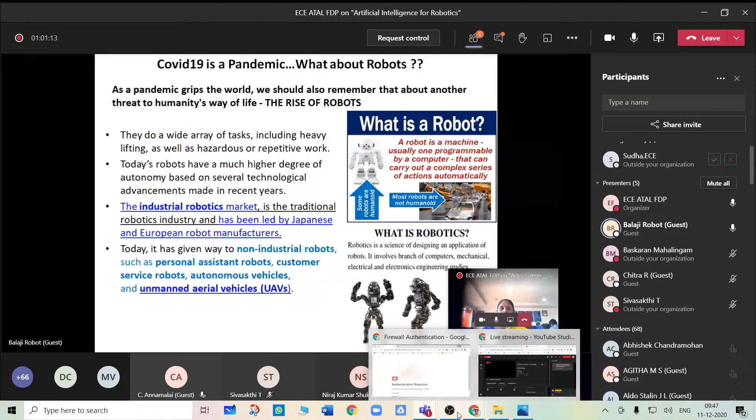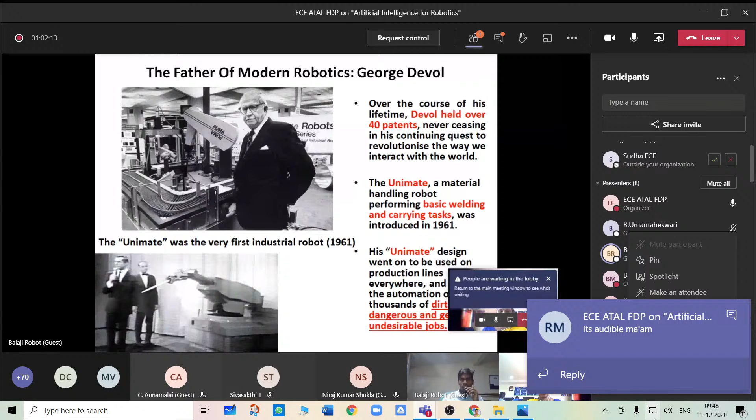Major reasons for using robots: first of all, rising labor cost, workforce efficiency, convenience, productivity, and these boost industrial robot demand.

The labor cost is significantly high in the total industrial operation cost, generally making up 50% to 60% of the total cost. For example, in operating a warehouse with manual jobs, staff consist of two categories: direct and indirect, and these departments manage the cost significantly.

Robotics has become a notable means to tackle the rising wages of the workforce. Industries are increasingly relying on robotics for a convenient and efficient way of reducing operational costs.

There are nine benefits of using robots: first of all, lower manpower cost, getting work done instantly, eliminating human errors, reducing human errors, improving productivity, and improving employee satisfaction. Next, you can scale up or down easily.

Like scaling to a bigger size, you can make our factory systems do better with less. This helps future-proof our industries.

Next, the types of robots, the classification. There are three major types: first, unmanned aerial vehicles; next, unmanned ground vehicles; and unmanned surface vehicles. These are the three things - the first classification in the robotic field.

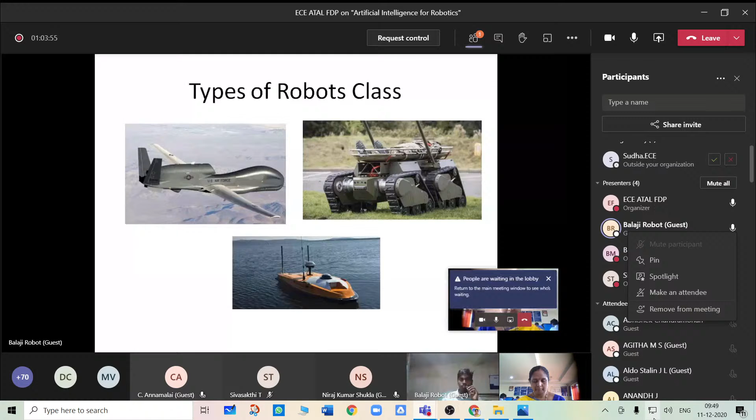Next, the applications of robots. First of all, home service - this includes home cleaning robots, surface cleaning robots, and personal support robots. Next, healthcare - healthcare robots replace the human hand.

It's like 3D printing human organs, which can be used in real time now. Neuroscience can also integrate with these applications.

Next, transportation and logistics systems. This system is used by Amazon and many courier departments. Pharma industries and various other industries integrate material delivery systems. This is one of the fastest growing technologies - logistics systems that can automate it.

Next, structure examination - this means developing a mechanism for army purposes. This is a very complicated system.

Next, exploration systems - this means robots used for Mars exploration. 5-10 years before, NASA used an 6-wheel based rover system. This rover is only applicable for use on the Mars surface.

Next, search and rescue operations - most often ground vehicles are used for this. Next, drones - drones are also used for inspections or for searching for human life or finding materials.

Next, environmental monitoring systems - environmental monitoring robots are also used for forestry. This robot is only for finding animals and monitoring animals.

Next, agriculture robots - agriculture robots are a broad field, with 140 countries doing research on robots in agriculture. In agriculture, there are lots of robots like unmanned tractor systems, unmanned seeding robots, and drones also used for seed purposes like crop monitoring systems.

Like I'm doing - I already did one robot in agriculture based on an unmanned tractor system. The unmanned tractor replaces humans.

Unmanned systems replace the farmer like a driverless tractor. This system can integrate autopilot, the harvesting system, and five sub-systems: seeding, ploughing, spraying, and surveillance. So these are all integrated into one machine, called the driverless tractor system.

Next, this is a major application of robots now. They are already being implemented in various countries.

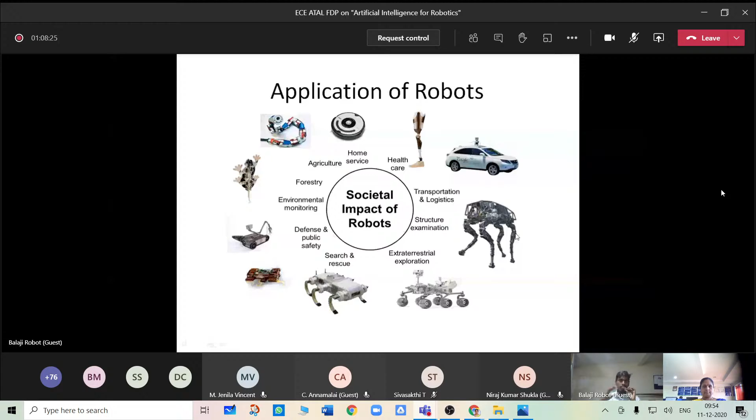Robots are as real as humans. Nowadays, the coronavirus has sped up the use of robots to replace human workers in various fields. Lockdowns have made humans more comfortable with the idea of connecting remotely. For better or worse, robots are going to replace many humans in their jobs. The coronavirus outbreak is speeding up this process. People usually say they want a human element to interactions, but COVID-19 has changed that.

This is the global market for robotics, not only industrial robots. Robotics is integrated across 27 departments. This overall shows the finding of the marketplace.

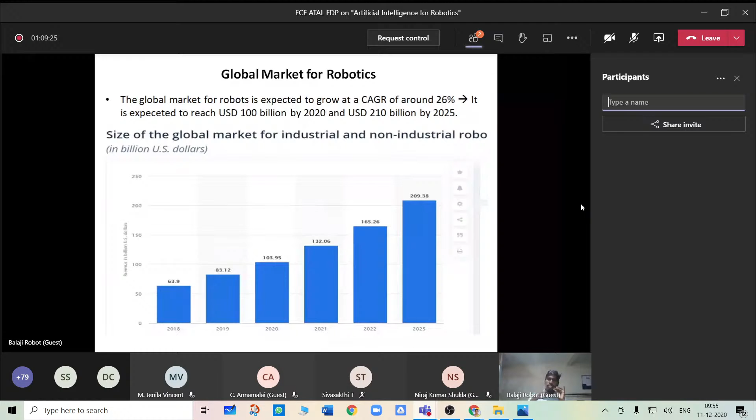The global market for robots is expected to grow at a rate of 26%, expected to reach 100 billion US dollars by 2020, and 210 billion as it continues to increase.

So to see the increase in the global market step by step: 2018, 2019, 2021, 2022, 2025, reaching billions in size for the global market of industrial and non-industrial robots. Industrial robots are particularly for production, like machine parts, while non-industrial robots include drones, unmanned ground vehicles, and medical robots. This is a big market now.

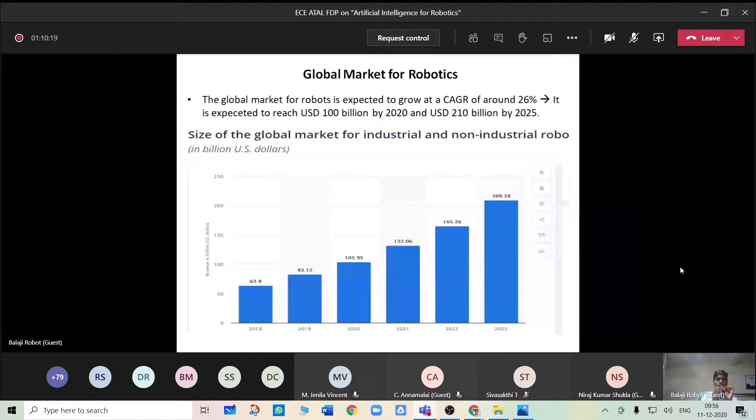This is the first part on industrial robots. Industrial robots have existed since the 1970s, used in factories around the world. The biggest users of industrial robots are the automotive, electrical, electronics, metal, plastics, chemicals, and food and beverage industries - this is the vertical within manufacturing industries.

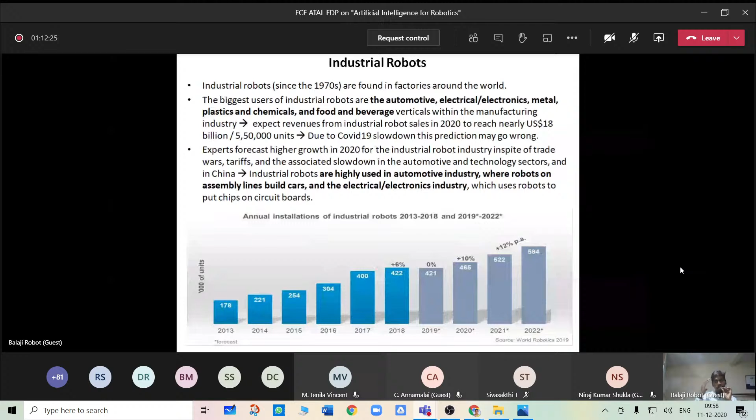Around 2.5 to 3 million industrial robots are already working in industry worldwide. By 2021, it is likely to reach 4 million robots, increasing further next year. Once installed, an industrial robot lasts a minimum of 10 years, sometimes working 80,000 to 1 lakh hours on average.

In 2018, there were 1 lakh 20,000 units for the automotive industry. For electrical and electronics, robots were already booked, accounting for about 60% of all global demand for industrial robots.

We can already see many case studies showing that even labor shortages in small industries can be addressed through automation - small industry persons can also use robots. So globally, next year will target major changes, also for India.

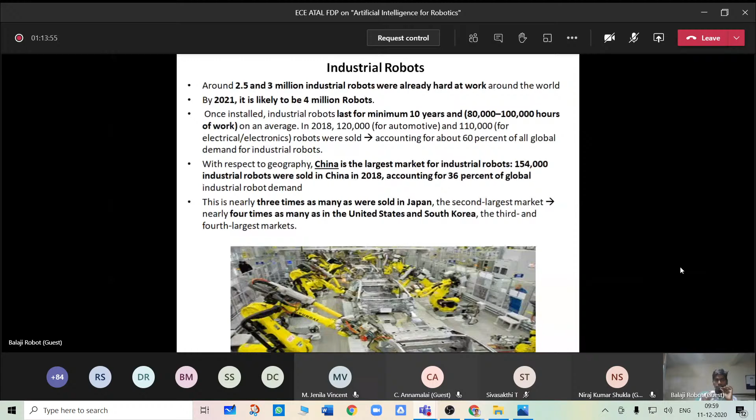With respect to geography, China is the largest market for industrial robots. 1,54,000 industrial robots were already installed in China by 2018, accounting for 36% of global industrial robot demand - nearly 3 times as many as were sold in Japan.

This is the second largest market, nearly 4 times as many as in the United States and South Korea. The United States and South Korea form the third- and fourth-largest markets.

Next, professional service robots. What is a professional service robot? It means a robot doing a particular application, like picking items from a warehouse. This is going to be a common sight - one pick-and-place robot to commonly pick materials.

Almost 1 million robots are expected to be sold to enterprises in 2020. Over half of them will be professional service robots, generating more than 16 billion US dollars in revenue and profits.

These are non-industrial robots. The market for professional service robots is growing much faster than for industrial robots. If recent trends are any sign, professional service robots may pass industrial robots in terms of units by 2020 and profit by 2021.

The professional service robot market is poised to surpass the industrial robot market size, fueled by new developments in 5G technology, like 5G telecom service, and artificial intelligence integrated with many machine learning algorithms.

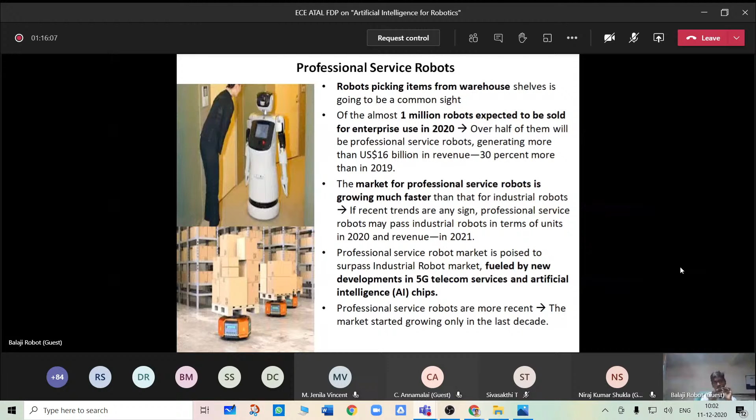There's a cost difference, and the amounts have very different growth trajectories. In a hypothetical fulfillment center or warehouse, the orange is the arm - the industrial robot.

The two low-wheeled vehicles are professional service robots. The industrial robot cannot move at all - it's a stationary robot. That's the difference - service robots can move on wheels. This includes medical robots and defense, which are like professional service robots.

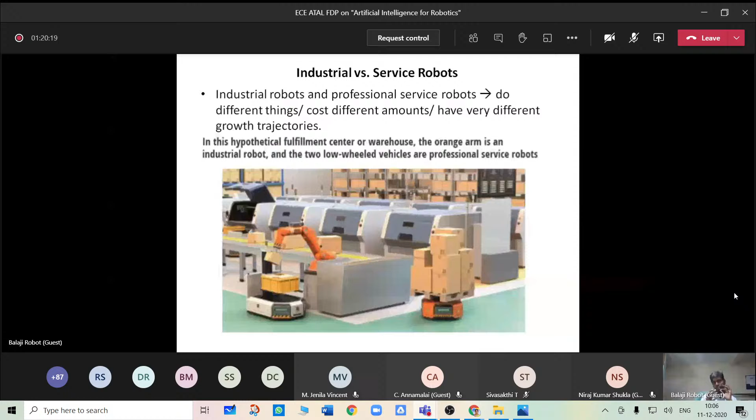Consumer robots and entertainment robots are low in revenue but high in numbers - low profit, but high demand and high numbers nowadays.

There are two largest and growing consumer robot market segments. Consumer service robots are designed for tasks such as vacuuming, mowing the lawn, and washing windows. This already reached 16 million units in 2019, up 40% from 2018.

Entertainment robots are mainly used as toys made in Asia, which are fairly sophisticated, reaching 4.5 million units in 2019, increasing more than 10% from 2018.

According to the WHO, the World Health Organization, and ICMR, social distancing measures are already being implemented. So nowadays robot workers may see greater demand. Over the next 5 years, demand will be very high.

Humanoid robots in Indian hospitals: this is already being done by many companies, like startups, and by research universities and colleges. Some service-oriented companies, even small ones, have implemented this on the hospital side.

They disinfect floors, sanitizing spaces using sodium hypochlorite solution, carry out temperature checks, and have facial detection capabilities, helping examine patients and other procedures, thereby reducing exposure to the virus.

This also arranges video calls with doctors in case of emergency, and guides patients from one place to another, anywhere in the world.

Next, it helps collect data from patients through interactive questions, with no more physical interaction needed.

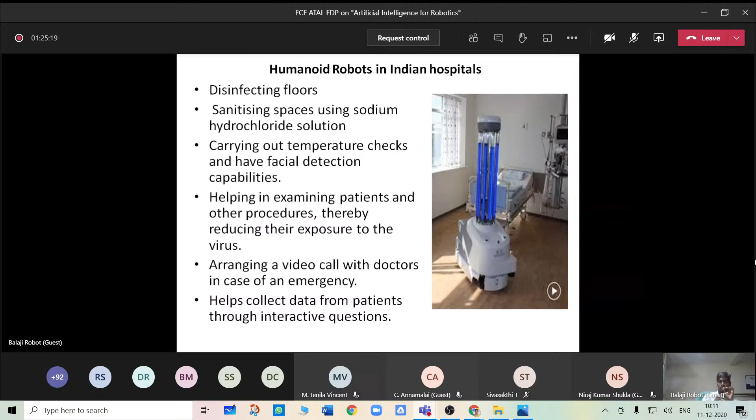COVID-19 increased demand for robots. The demand for robots has increased due to COVID-19, as predicted by UK-based data analytics firm, GlobalData. This company, which makes cleaning and sanitizing products, has seen the demand.

UVD Robots is one of the top companies, a Danish manufacturer of ultraviolet light disinfection robots, having shipped hundreds of its machines to hospitals in China and Europe.

I think last year I visited China, and I saw hospital robots and airport assistance robots also implemented, and in Europe as well.

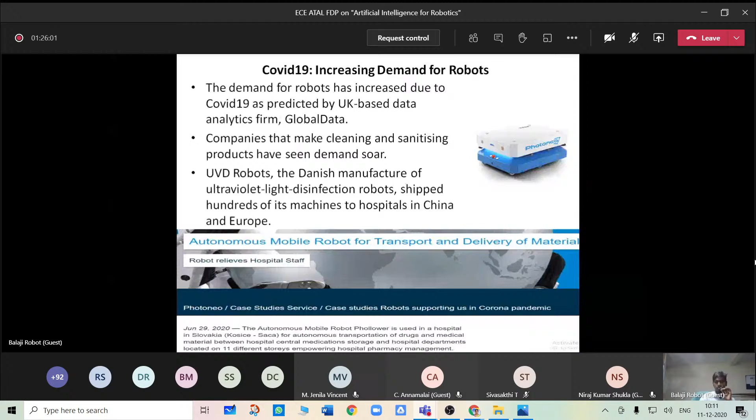It requires the use of education. There's a learning curve for end users to be able to have consultations through a robot. This is a very alarming challenge nowadays.

What's the future? What about service roles where people need lessons or guidance? What about teachers, professors, lecturers, lab inspectors, or anything else that could be replaced by robots? Robots are going to replace tutors in schools, fitness trainers, and financial advisors.

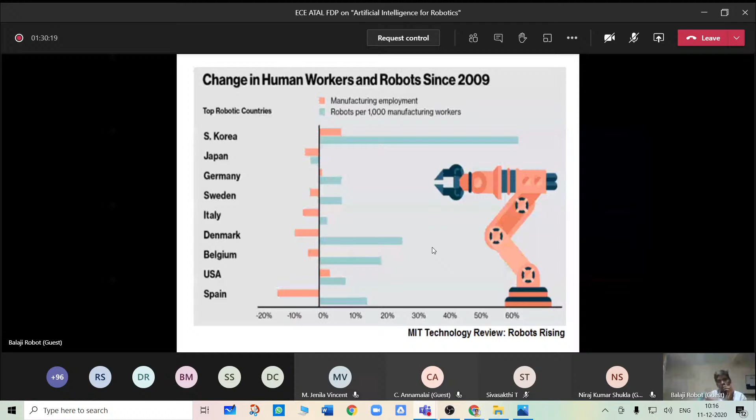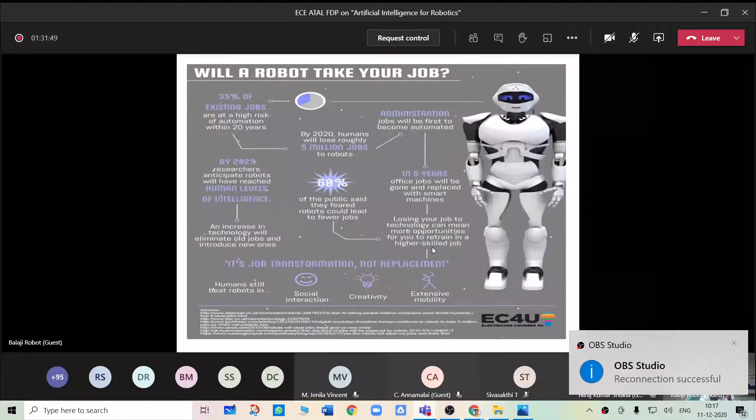By 2029, researchers anticipate robots will have reached human levels of intelligence. Humanoid robots can definitely reach human level intelligence and sensible thinking. Artificial versus human intelligence: advanced machines and technology might become faster, but a human brain has more cognitive capabilities. A human could make better decisions compared to a robot because humans are made of blood and flesh rather than bolts and nuts.